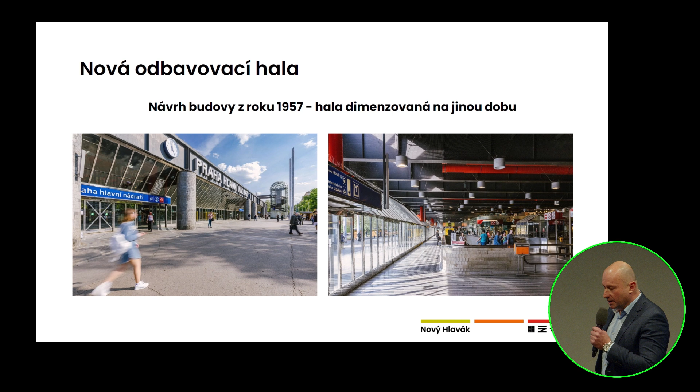So why did we embark on this project? This is the new terminal hall as it is today. It is based on a design from 1957. For that time, it was actually a wonderful building. It was also a result of an architectural competition, and I believe that it really fulfilled its function well.

On the other hand, today, we need to look further ahead. 1957 was a year when nobody thought about a high-speed train connecting Prague and the rest of the Republic with Europe. Nobody at that time could foresee the boom in railroad transport, in suburban and long-distance travel. And today we have to respond to these changes if we want this station to still be the main station.

We are talking about many people coming here for work, and there are tourists coming, and also for studies.

We have to respond to these changes. For the future, we presume there will be a high-speed train route, now being designed on a massive scale. We hope to start building them in a couple of years. It's a phenomenon that's been around in Europe for some time already, and we are a bit late. In Poland, these kinds of projects are designed on a massive scale too. If we want to be in Europe, and if Prague is to remain in the network of European capitals, we have to embark on high-speed rail transport. On top of that, we have huge growth in suburban and long-distance railroad transport.

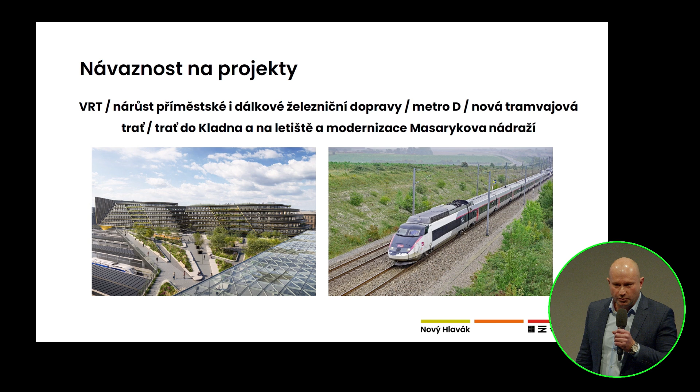If you look elsewhere, especially to Western Europe but also Eastern Europe, you can see each capital is preparing similar projects. They are reconstructing their main stations. Many are already completed, such as Berlin, Vienna, Rotterdam, or London, to name a few. There's strong support for public transportation, which is environmentally friendly, and we are joining the bandwagon, simply doing the same.

There was the Grande Stazione company. Many people actually say, why are you going to reconstruct it? Grande Stazione already did their job. But actually the only thing they did was put commercial units there. They tried to maximize commerce, but they were not addressing the terminal hall as such. The reconstruction is already outdated. There is a strong need for renovation, and Grande Stazione did not address the problem of insufficient capacity.

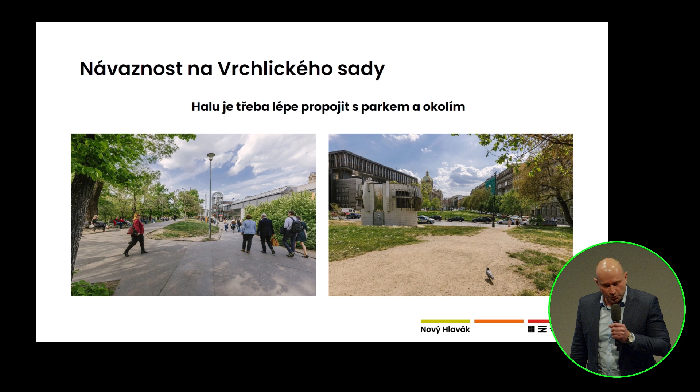How to make it possible, not for 90,000, but for 200,000 people to be there every day? That was the main reason why we had to start looking for a solution, and we wanted a transparent and fair solution, which is why we chose the competition dialogue, making it possible to approach the best architectural studios globally so we obtain high quality architecture.

Of course it is not easy elsewhere abroad. The projects always bring many emotions, many reactions to that. When you look also elsewhere, you see that railroad stations are part of the cities, and people of these big cities are proud. If you look at Austria or Germany, frequently the main station is really the landmark. That's why it's worth focusing on this place.

So now I would pass the floor to my colleague Jakub Hendrich, who is going to talk about the architectural competition.

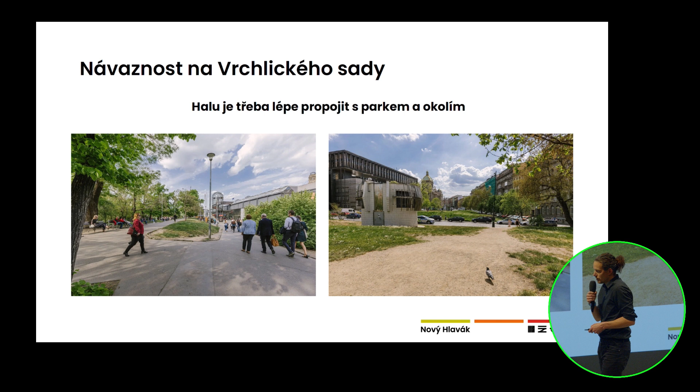There have been very big influences, and the biggest change was connected to the construction of the terminal hall. Now it's very hard to keep the park in a certain structure. There are many people walking through the park, many visitors, travelers, etc. But it does not offer any benefit for the people around there. There are no activities, but there's also no biodiversity. There are no ecosystemical services.

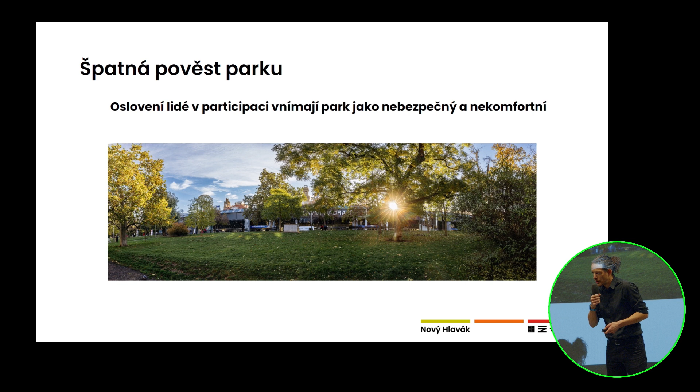When we prepared for the dialogue, we talked to people who use the park, who walk there, and we wanted to hear from them how they use the park or how they would like to use it. And that was very important feedback, because we could see that there is a lot of potential in that park, because there are many users who would like to actually use that park, but it does not fulfill the benefits that they would expect.

A similar topic is the tram tracks, which also means connecting the train station to other connections of public transportation, excluding the Metro C line. The main station only has one metro line as of now, and that's quite a big deficit.

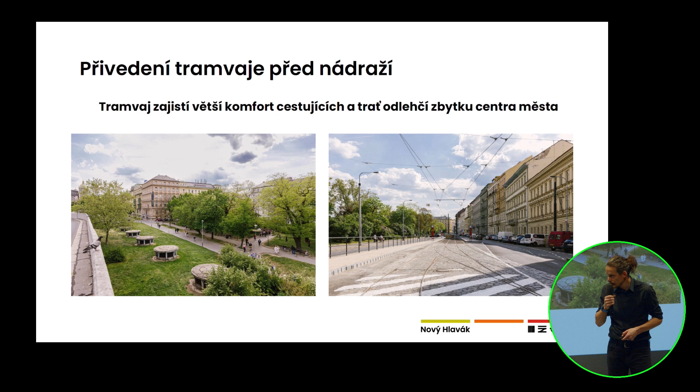There used to be a tram track right at the railway station. It has been removed, and now we are looking for possibilities on how to integrate the tram tracks into the railway station, which should be - even with the Ministry of Culture and with the ground plan or land use plan, it was also a topic how it should be integrated. This was also one of the basic and important conditions, that the tram tracks should be in there. It's also part of that land use plan, but it has to be done in coordination with a solution of how to create that park.

I touched upon this topic. There are areas in the park that cannot be defined. They don't have a concrete function. They're not being used. It's maybe just used for the parking of filmmaking people, for example. So I don't think this is something very useful for a location in the city center of Prague.

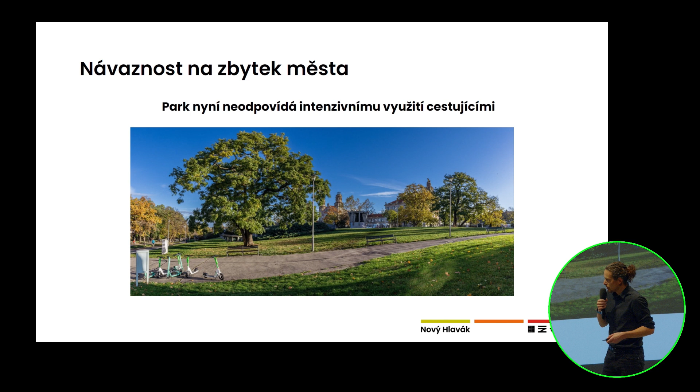And of course, it's also connected to how the park behaves, or what the relationship between the park and the hall is, and how these two parts communicate with each other and how they are connected to each other.

Now we should look at the process, what actually the task of the competitive dialogue was, how it was structured, what task the teams received. Also we will later see how the respective teams reacted, and then we will see the winner, actually the winning design or draft.

There have been 3 sides who actually opened it. It has been entered by the Prague Public Transportation, the City of Prague, and Správa železnic. The City of Prague is responsible for the park and the streets around. The Prague Public Transportation Organization is responsible for the tram tracks in Bolzanova Street and how this network should be connected to the city. And of course, Správa železnic is responsible for the terminal hall.

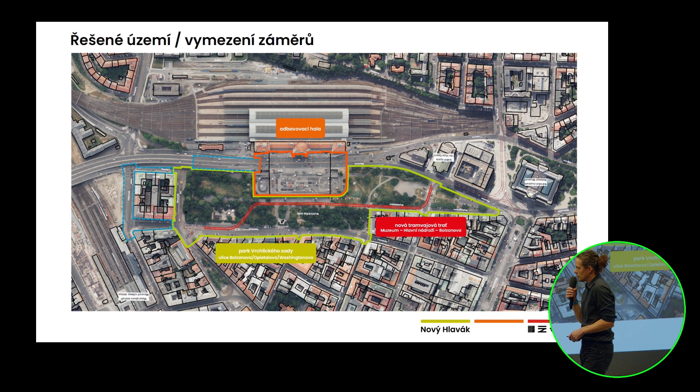Here on the picture you can see that the terminal hall is not just what we see from the park, but it's a huge building that is also connected and somehow separated through the magistral highway. So the solution and the coordination will not be easy. From the early days, we knew that it's going to be difficult, and that's also why we knew that it would be difficult to be successful to really change the whole area.

We had a robust system where upstairs we had some structures. There was IPR, the city, who was responsible for the project, but at the same time, we also had to discuss who's managing the whole dialogue. We also had legal support. We received support from other parties - either the public, their participation, it was some parts of the city or heritage offices, and of course there has been the jury, the committee. Altogether this created the process of this competitive dialogue, and we expect that this organism is going to live longer and continue.

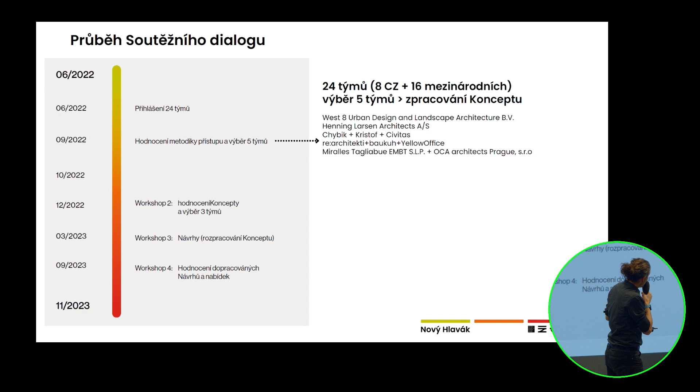The competitive dialogue has a number of phases. We had 4 phases. Looking back, I think it was good because we did not only work on the task, but it was also about the addition of documents and specialization. But step by step, we could also reduce the number of participants. This helped us to work with the individual designs, comment on them and proposals, and find the best solutions for the final designs.

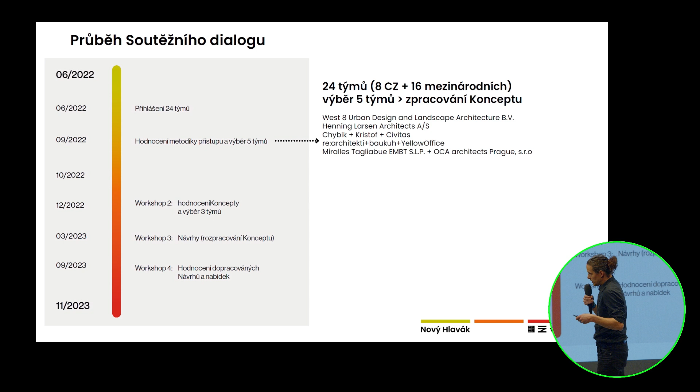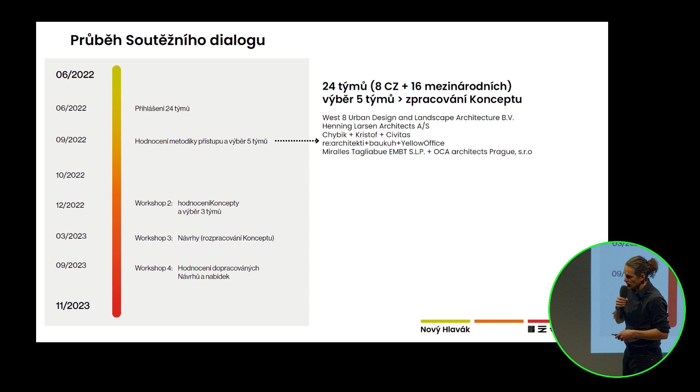At the beginning, we had 24 teams. They handed in methods of how they would explain, and they tried to defend it with their references and what they describe, and how they could realize it. It's also important to mention that in the team there had to be 3 experts: an architect, a landscape architect, and a transportation engineer.

Regarding the concept phase, I will have to go one step back. From the 24 teams, there were 5 teams that could continue to the next step, where they worked out their concepts, the basic way of how to solve that solution. And from the 5 teams, we chose 3 teams that created a final concept and a detailed concept, and that's what they handed in.

How was it structured? What did the teams get? What was at their disposal? There was some documentation, some historical research of the hall, the park, and participation of the public that consisted of different phases and focused on different parts and groups. But then also some technical documentation.

For example, the number of people walking there or cyclists has been calculated.

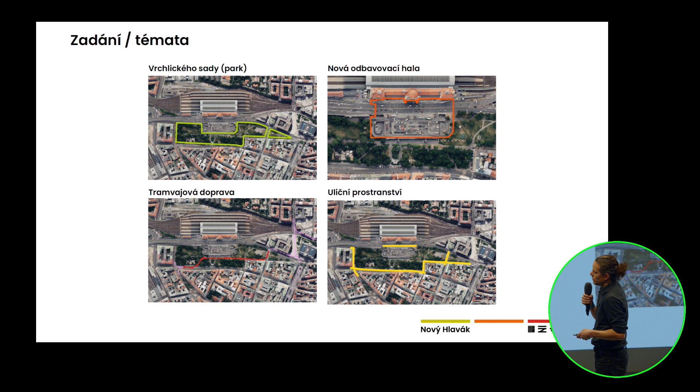So it's not about the current state, but how it's supposed to look in the future. And then, what was their task? It was about 4 parts: the hall, the tram track, and how to solve the solution in the neighboring streets, especially about transportation.

The respective topics, we had subtopics later on in the phase of the process, and we could see that this is just an example of a few topics that we can find in that area. But these were topics we expected from the competitors to find solutions for, and there should also be an interconnection between these topics.

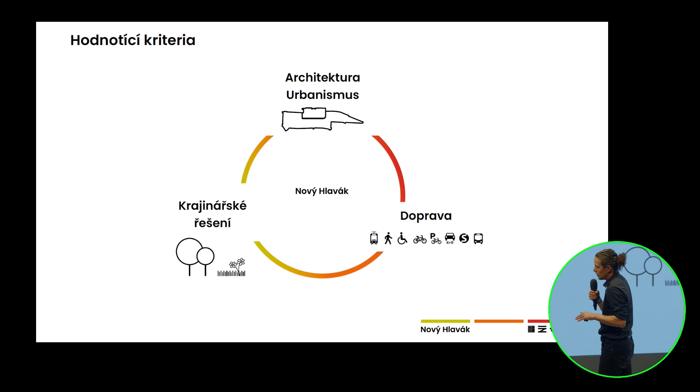And for me, one of the most important schemes of how this competitive dialogue was working, and also how to actually grade it and use the criteria, was urbanism and architecture, landscape solutions, and transportation. Of course, below these are just headlines of other topics, and these topics are influencing each other.

If the quality works well, then it might be stronger than some other solution, for example, architecture or urbanism. So this is an important part.

In the beginning, when we initiated the work, I really liked the synergy between the three institutions, and it would be great if from this synergy we could find a harmonic solution, a vision full of harmony. And I think we also succeeded in that.

In the beginning, we received 24 concepts of philosophy, so to say. We chose 5 and asked these 5 to really create a concept, a solution. And very early we could see the core of the problem that deserved a reaction.

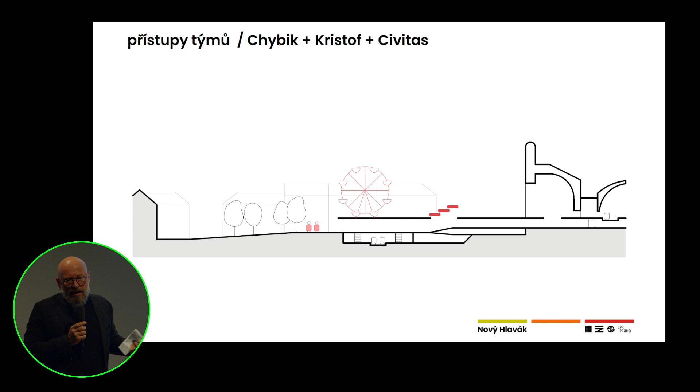Actually, it made it even more complicated, and it cemented the situation as it is today. Moreover, this semi-public space would be dependent on artificial promotion of the events. Someone would have to organize these events, and it would not be for spontaneous events.

Another team decided to make there a roof which would be slightly elevated, which would also let some daylight enter. There would be glass used in the roof, which would mean that again it would be much lighter inside the terminal hall, suddenly making it into a more pleasant place. But still you see a barrier between these places. You still did not obtain a permeable space.

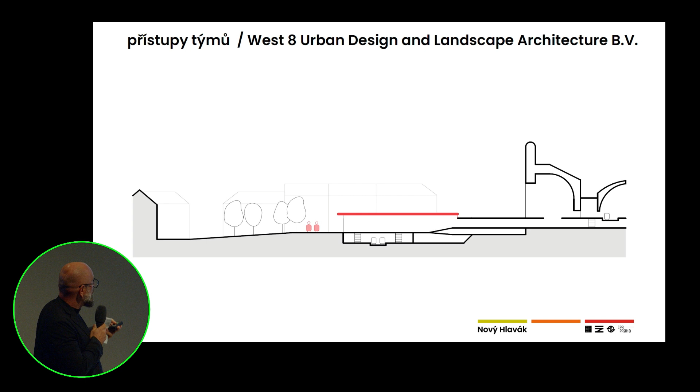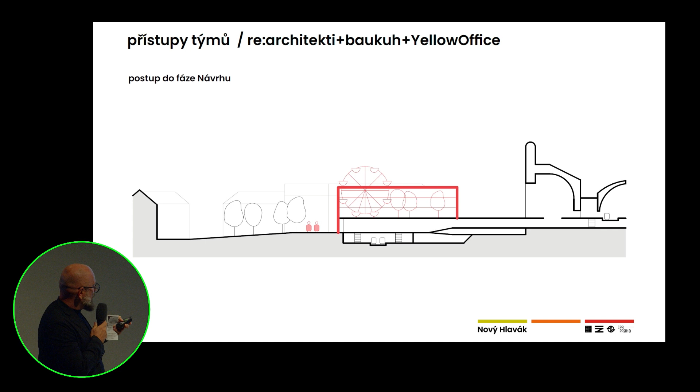Another entry decided to add two new buildings from the south and from the north. So there were two add-ons, and the parking place was to be turned into a piazzetta with three parterres. One of them would be bordered by these two add-ons, and you would obtain a kind of piazza there, inside a piazza, and that was an interesting idea. But again, it is dependent on the activities which would have to be organized artificially. They would be dependent on somebody animating this place deliberately, and it would perhaps not be a part of a naturally vivid place, an urban place. As for the communication links, they did not change that much, and that is why this entry was not seen as very impressive.

Another one, which was among the top three, did not dare to remove the parking deck physically, but just decided to change the function. They put a new identity to the place by adding new glass roofs, which was a free interpretation of the halls above the track yard. They created something like a winter garden, a huge greenhouse, which would go to the center of the former square. So basically, you would hide everything under one greenhouse, which would be a kind of orangery, with the possibility of organizing markets, seasonal activities. But it was really a greenhouse space.

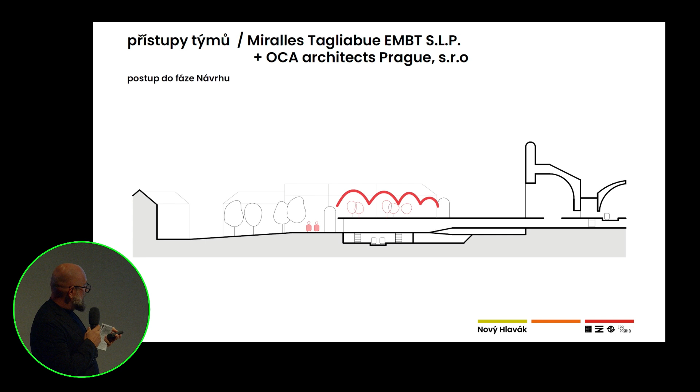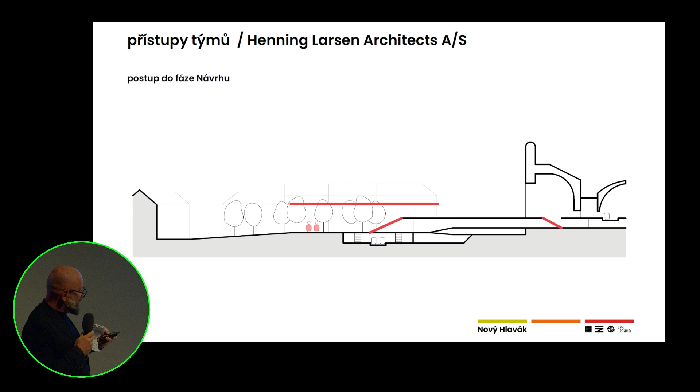And then there's another proposal, which had a very radical approach. Let's simply remove the parking deck. Let's just do away with it, and we will just close it where we need it, where we need just the facility for the travelers, and otherwise let us go back to the original contours. In other words, the part where you need comfortably to get people to the metro, to the tram, would just be covered by one roof, which will be transparent, but otherwise you make it perfectly permeable. That actually is the winning design, which convinced the majority of the jury.

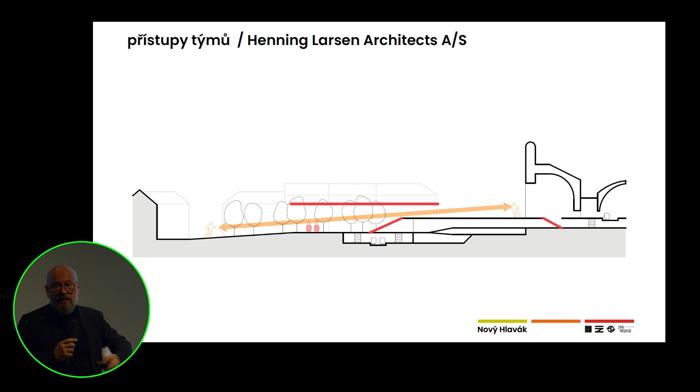In terms of restoration of the original contours of the space, we found that this intervention is not only radical and revolutionary, but also very sensitive to history, to continuity of the space. You are removing part of the building that we are respecting, but at the same time they are preserving the ground, and they are preserving many elements, and therefore they are even coming back to the original contours, giving this public space its original borders. Thanks to the humanization of Magistrala, it is now, or it will be possible, to go from the Fanta building on foot, normally, through this whole place. You can go across it without having to dive underground.

As I said, we had 27 members in the jury, each from a different expertise. There were 11 architects and then other experts. And yet, we managed almost unanimously to agree on the winner.

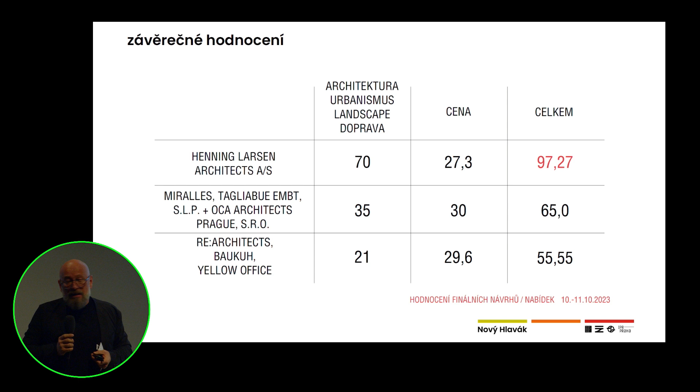We were evaluating several aspects according to criteria which were given beforehand. As you can see, there is a large margin, the winning team won by a large margin. Actually, there was a lot of discussion about the second and the third place, but there was no doubt as to the winner.

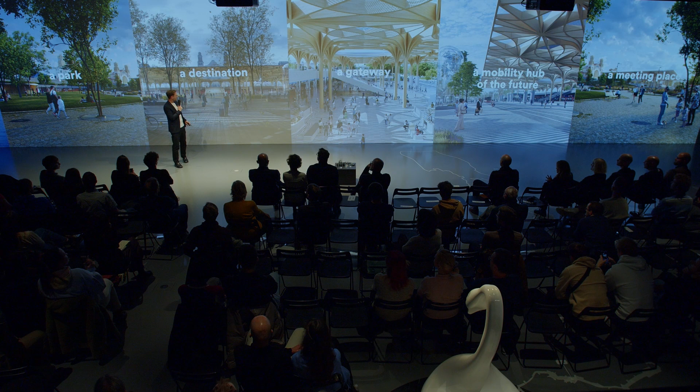So when we talk about these ambitions, it is about celebrating the place through the seasons. It's about creating landscape, hardscape, softscape, for recreation, for activation, and so on. It is about creating a memorable space, whether you're outdoor or indoor, but also integrating future mobility with trams, bicycles, buses, metros, and trains, so it really becomes a true meeting place.

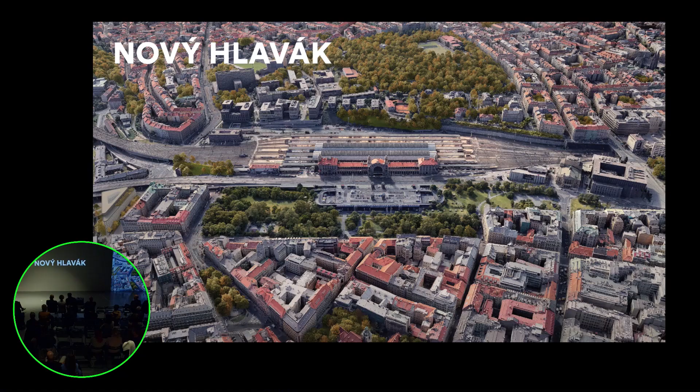This is the station area as we see it today. We see a huge potential in it, which also means that we see some issues. Some people before today already explained some of the issues. We really analyzed the place in the first stage of the competition, and we could see a lot of borders between the park, the terminal hall, and the existing historic Fanta station. These borders we are aiming to break down and reconnect the station area with its city, with Prague. We see this and we call this a mobility park of the future, which is not only about running through, but also a place we want to stay.

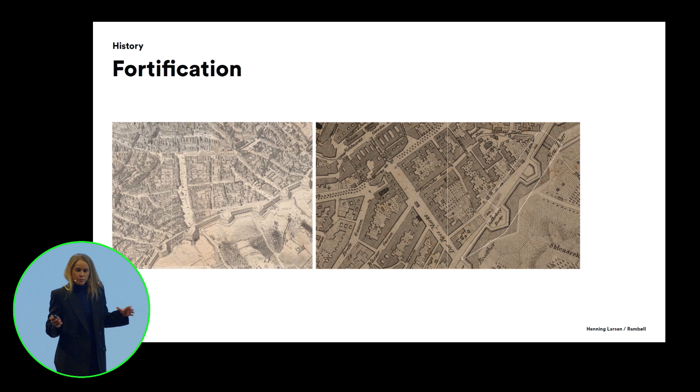This station area has been a fortification area before. It has been the green belt with a fortification around the historic city center of Prague. This area transformed into the station area, first with the Franz Josef station, which was located directly here on the historic city edge. It was back then connected with the park, which was a really pleasant space for leisure, for recreational purpose. It was the place where you went with your family and strolled around, had an ice cream, and enjoyed that park. Also, the Franz Josef station and the new Fanta station later were actually really active buildings. It was a smaller road back then, and you parked here, you could go in and out, and had a really active, lively frontage. It was part of Prague, part of the everyday life. Also here we can see already the fantastic trees which survived from that time.

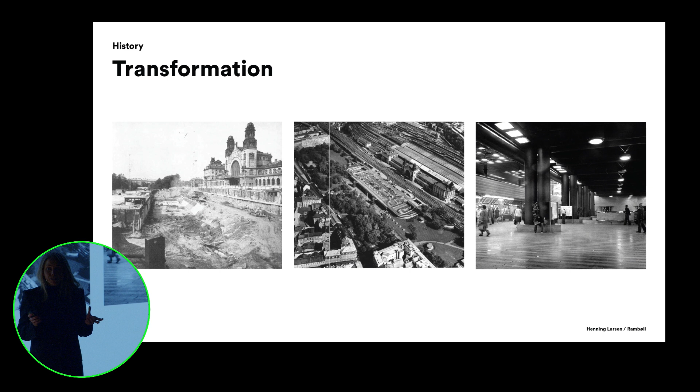The area got transformed, as we heard, many times, and the last larger transformation came by establishing the Magistrala. The Magistrala is probably why we have a lot of the issues which we're facing today. It was really disconnecting the station area from its surrounding. Also with the extension of the terminal hall, we can see that these borders created an even bigger disconnection to its city and to its environment. Looking at the terminal hall, we can also see all the craftsmanship in there, and we love and we are inspired by this fantastic detailing and choice of materials, particular design from that time.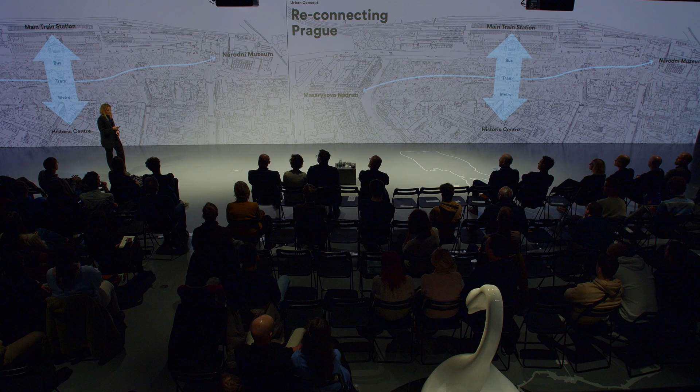So what's next? We try to focus on the bigger lines first, which are really about connecting the main train station with the historic city center. The other direction, north-south, is not least important, and we worked a lot with connecting the Masaryk station together with the entire cultural area. So these were the parameters we drew up first. When you look at this drawing of today's station, you can see that you have the Fanta building with the trains, you have the bus stations, you have the metro station in the underground, and the future tram station really disconnected from each other.

We are working with preserving, we are working with extending some of the existing, and we are working with adding a new collective roof. And this allows us to actually span out and reach out, connect all the different modes of mobility, the tram station, the metro station, the bus and kiss and ride, and even the connectivity to the trains under one collective roof.

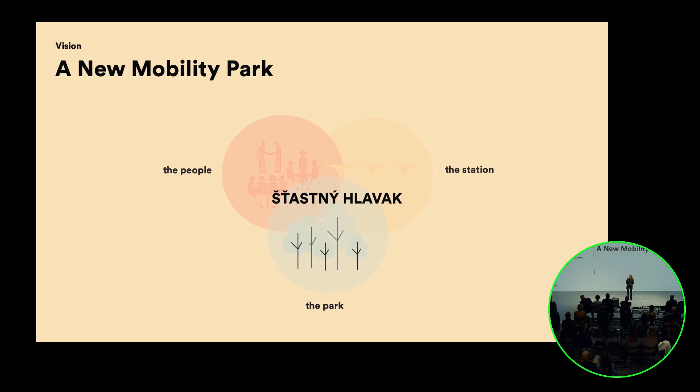From the beginning, our vision has been to create a holistic vision here, to not think about landscape, architecture and urbanism as three different silos, but think about the people which flow through the nature and the station as one project. We focused from the beginning on three strategies, which we refined throughout the process.

We thought to create this mobility park of the future, we need to develop a strategy which takes care of safety. It's important to create a safe space where the people in their everyday life feel safe, but where also transportation can work in a safe manner. We worked with mobility, not only about seamless mobility, but also with future mobility, focusing on enhancing sustainable modes of traffic. We also worked with last mile connectivity, and my colleagues will tell much more about this in detail later.

Heritage, we had a really clear vision to preserve as much as we can as the first thing. The next step is to extend what we have and actually draw from the qualities which are there. And then, last but not least, we are adding a new layer on top, designed according to future needs, and we're trying to reduce as much carbon as we can here on site.

From invisible places to an inviting gateway of Prague. From disorientation and really an introvert feeling to distinct and intuitive wayfinding.

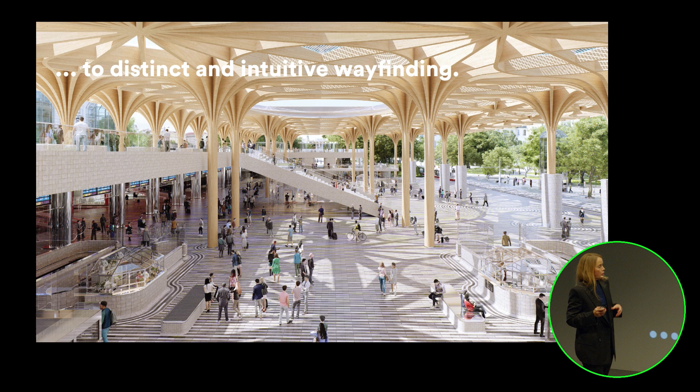From closed edge zones, as for example here, the Bolzanova garage, which is actually lying underneath the Magistrala, and not a lot of people know about it. It's empty since many years. We go from this to vibrant and active cityscapes, which create a safety feeling, but also give a liveliness and influence the park in a very positive way.

From obstacles and borders like bushes, to seamless flow and overviewable wayfinding. From a disconnected park to an inviting arrival square and of course destination. From an introvert station, as we found it from the beginning, to something which opens up to its city in a very generous way and welcomes the citizens of Prague, not only in their everyday life, but also when they go out on larger journeys to Hamburg, to Munich, and so forth.

I will give the word to our landscape architect, who will present the landscape part, and after that Mikkel will go more in detail on the architecture. Thank you.

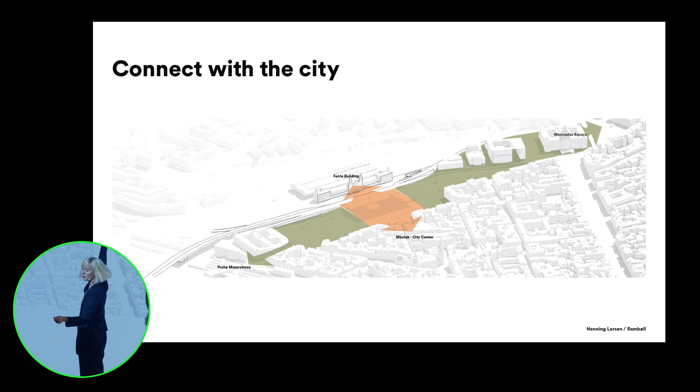So what was important for us was to connect - first, connect the Fanta building, the terminal hall, and the city center, but also connect all the way up to the Narodni Museum and to the Vrchlického station. Next thing is to think about the park and the terminal hall as one thing, not as a station and a park, but actually integrate the station and the park together, to bring the park into the station, but also bring the station out into the park.

Because this is amazing, that you actually arrive in your city into a park. You don't see that many places, but here we have the possibility of doing something extraordinary. It's also about activating the park and bringing it back to Prague, really giving the local people a feeling of a destination, a place you want to come and visit and hang out and be.

So we divided it into three different zones: the active zone, which is more for the local people, the station plaza, which is this arrival place, and then the cultural zone linking up to the cultural institutions in the south.

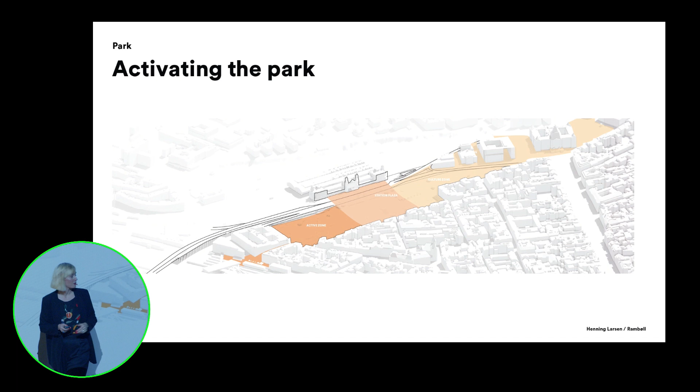And here you see the new park. For us, it was both about being inspired by the history, by the organic shapes, by the beautiful trees that were planted at that time, and also about bringing back the water feature and placing it on the arrival plaza.

We were very inspired by the newly renovated park around the Narodni Museum, which is really beautifully done. So we take this cobblestone peacock pavement and bring it all the way into our park, really connecting these two parks to each other. We also bring the furniture and the way of planting into the park, so it becomes like a big green stripe in the city.

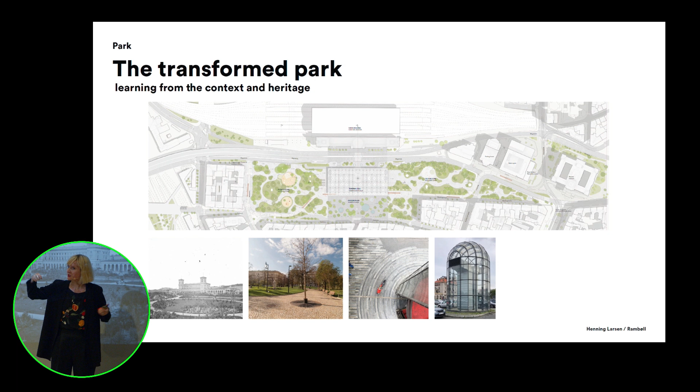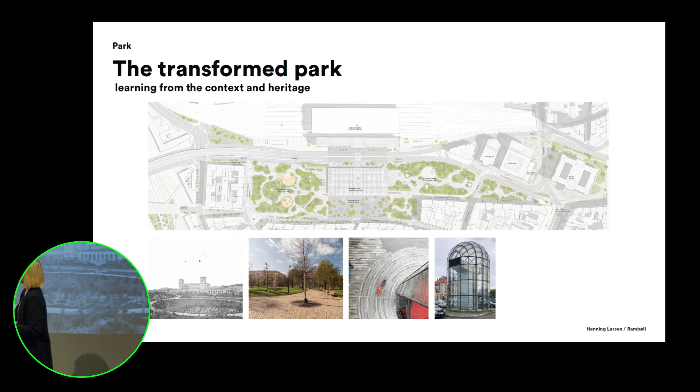And then, of course, we really love the elements of the terminal hall - the pavement, the curves, so many beautiful details that we wanted to bring out into the plaza and celebrate. So it's where you are meeting Prague and where you are invited to the city on foot and continuing your journey.

And then the trees are very important for us. It's the character of the place. They have these beautiful pagoda trees. When renovating this park and bringing in the tram, we will have to take a lot of trees down, unfortunately, but we are replacing them with the same amount of trees, keeping up this character of the park, because it is so beautiful.

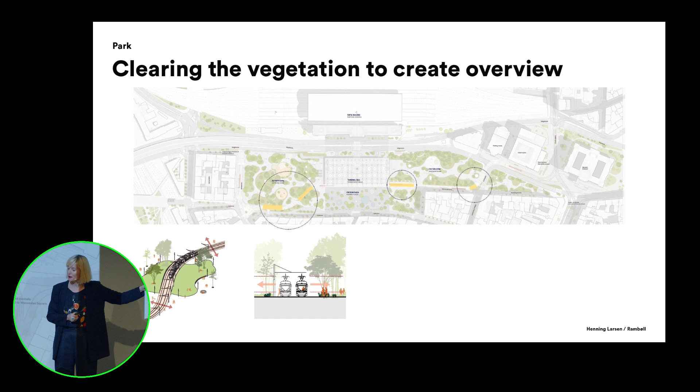It's important for us to clear the bushes and create visibility throughout the park, not only for the tram people so they can see other people coming and don't hit them, but also for you to see each other, because that makes a safe park and a safe space. Then we reintroduce another layer of vegetation, which is lower, and which brings in the seasonal aspects of the year.

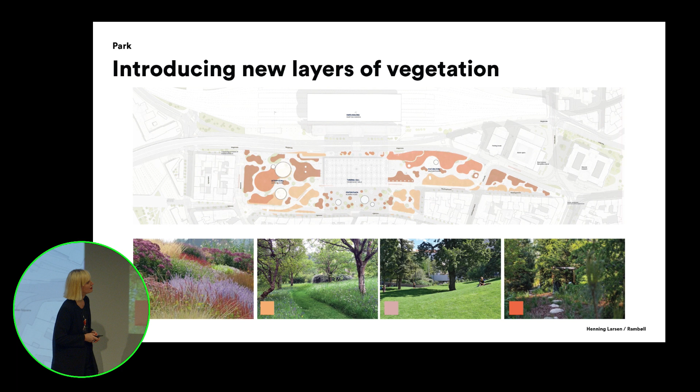It's also how we use the plant beds for water treatment. In case of a heavy rainburst, we can lead the water all the way into the plant beds and hold it until there's room enough again in the sewer system.

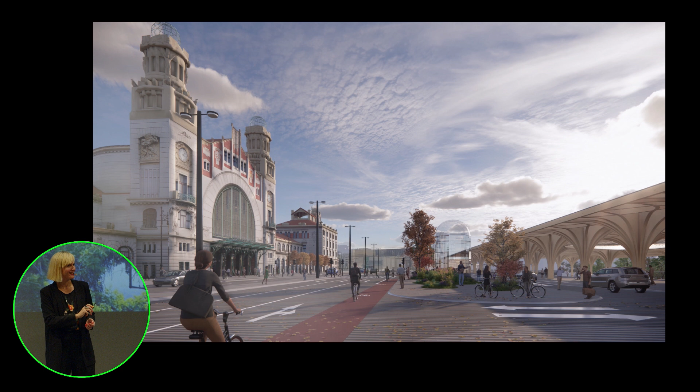Here we see the park, the new pavement, the peacock cobblestone pavement, the new elements of vegetation, and how you can overview most of the park, with different activities being spelled out, which I will walk you through in a moment. And then also keeping, of course, the monuments of the park, both the historical parts, but also the monuments from the brutalist period, because they hold a big history and a big sense of beauty.

Here you see the station plaza. What you experience today coming out of the station is a little disorientating - where should I go, how do I proceed with my journey throughout Prague? When you come to Opletalova Street, you meet a massive barrier of parked cars and a road. And coming from the city and entering the station, it's really a barrier to go through.

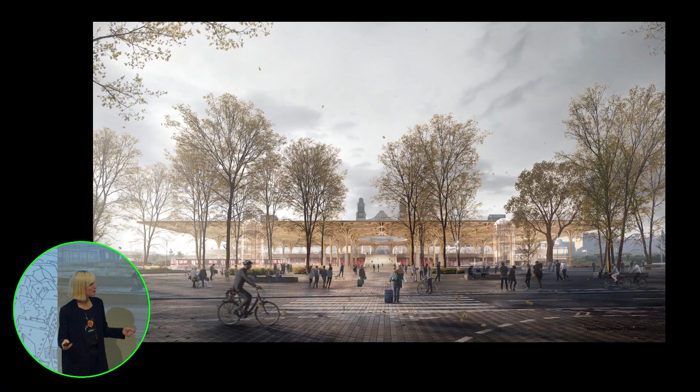So we are opening up, taking away a lot of the car parks and allocating them, narrowing down the street, and making sure pedestrians can come safely across Opletalova Street. And then making this arrival plaza where it's possible to wait for your family or for the train to come, park your bike, and enjoy this beautiful big plaza. We're also taking the striped pavement all the way up to Wilsonova Street and connecting it to the Fanta building.

And here you see the situation of coming from Wilsonova Street and arriving to the city - it's actually possible right now to see where you are and where to go.

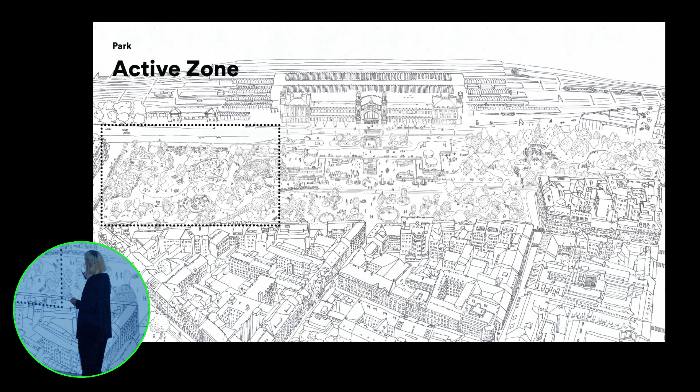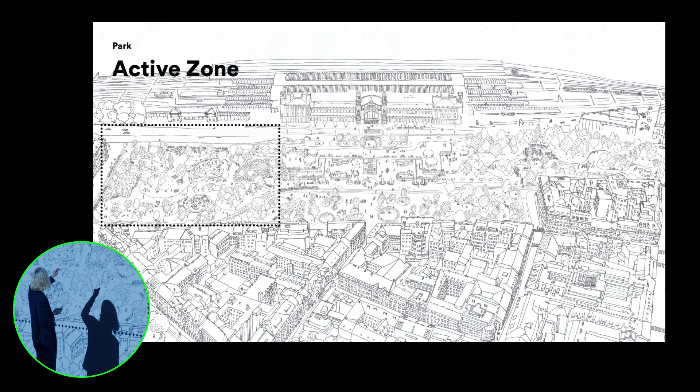The active part in the north is kind of like a local park - it's where you go on Sundays for a picnic. We are refurbishing the playground. There will be an area for dog walking, a skate park, and the Bolzanova garage up here is being activated again, so there will be shops and bicycle repair. It's really a place to visit, enjoy, and be active in most of the day.

Here you see the Bolzanova garage, which is being transformed, also making sure that the massive flow coming from the train station onto Masaryk station is provided for and easy.

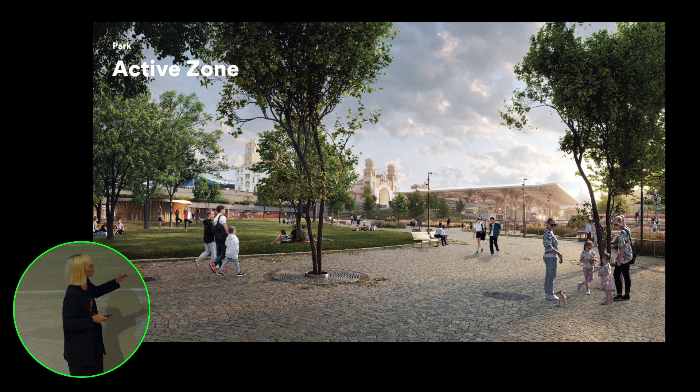And here again, the transformation. The utility lawn, which is there today, we are keeping it - it's a nice place to hang out. But there's also a lot more activities going on in the park.

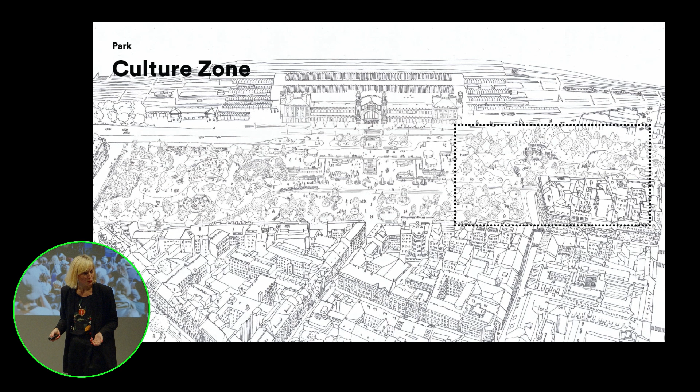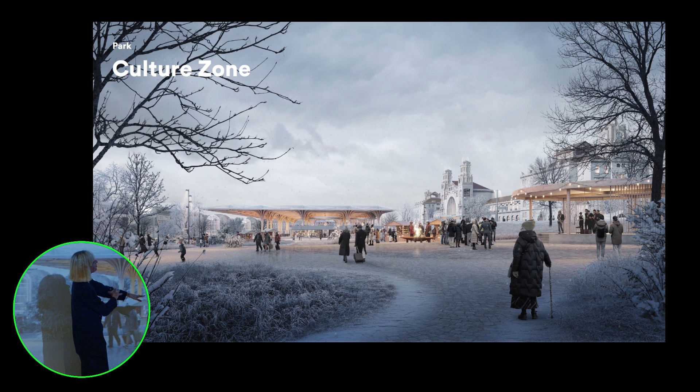And then last but not least, the cultural part, which is more like a regional area where all of Prague is invited in. It's an unprogrammed space, you could say, where everything can happen. We are placing a pavilion up here, so it's possible to have a concert and different activities - it could be a Christmas market, a flea market, a community dinner, anything could happen here. And here we see the winter situation, where you put up small Christmas shops, there's a bonfire and maybe music playing. So it's going to be this lively place that you can walk through and into the station. And here you see how the park continues under the roof, celebrating the situation.

And now I think Mikkel will continue. Can you hear me? Yes, there we go.

Of course, when we design such a big mobility park for the future, it's super important how we design for different modes of mobility. We like to work with these pyramids where we say we need most from the top, where it's widest, and least from the bottom. So we've designed this with pedestrians in mind as the first thing, making sure there are the routes required through the park, but also inside the terminal, cleaning up the mess of the historical layers and making sure there's enough room for the flow of pedestrians coming through here.

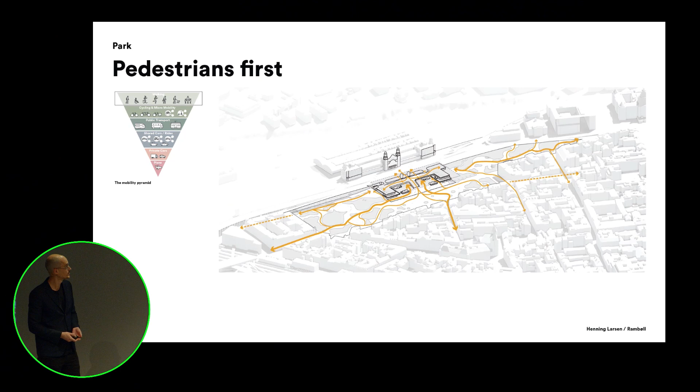Next is about enhancing the journey for bicycles. There's a bigger plan of transforming Prague into a more bicycle-friendly city, and we are tapping into that bicycle plan, ensuring it's easy to get access and get close to the station with your bike. There's great opportunities for parking, both long-term indoor bike parking and short-term parking close to where you arrive.

Then we look at public transportation, where, as mentioned earlier, the tram will be easily accessible and protected under the roof from the weather. The bus stations can also drop off below the roof up on Magistrale. We also provide kiss-and-ride facilities for taxis, Ubers, and shared car systems.

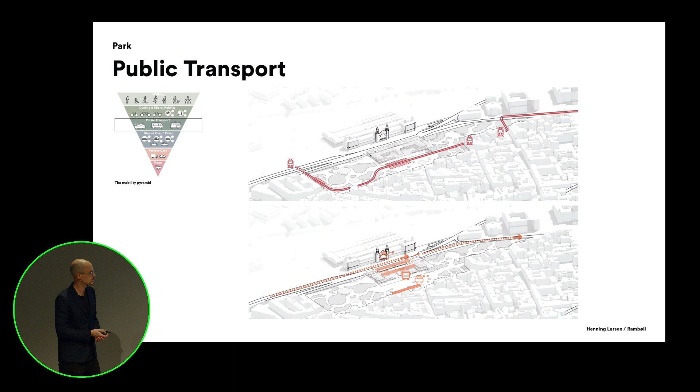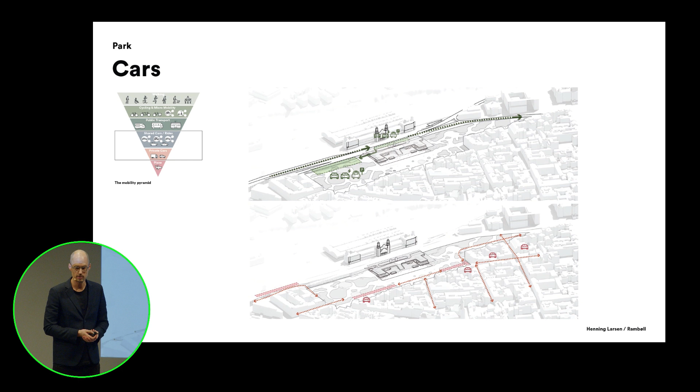At the bottom we have private cars, where of course we still need cars going to the site, but it will be minimized as much as possible. We're cleaning up a lot of the parking on Opletalova Street, while ensuring there's still enough parking for residents that live there. We're also working with the Bolzanova garage as a parking facility that could be used in the future, but could also be transformed over time into the retail we saw earlier, or into more of a mobility hub with shared car systems and charging for electric vehicles. So that was the mobility.

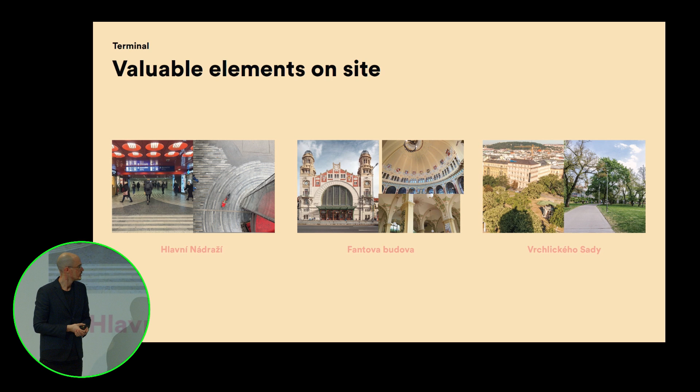Now we'll go back and talk a bit more about the architecture and the inspiration for the design. When we approached the site, we immediately saw a lot of qualities: the existing terminal hall with its fantastic design language of iconic curved shapes and stripes, the Fantova building, which is a bit hidden today but has beautiful exterior and interior details with arches, dome shapes, and wooden details, and of course the park, which has been mentioned several times already.

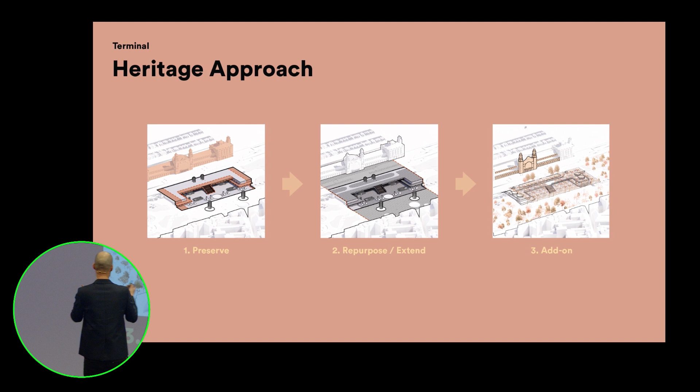So we started investigating the layers of time - what is there, what should we keep - and from there defined a heritage approach, which Grete already mentioned earlier. We try to preserve as much as we can in the terminal, but we still need to reduce or remove the facade and roof to allow people in and get the views. Besides that, we want to preserve as much as possible. Then we repurpose, extend, and even drag elements from the design into the park and into Magistrale, and finally we add the large generous roof on top.

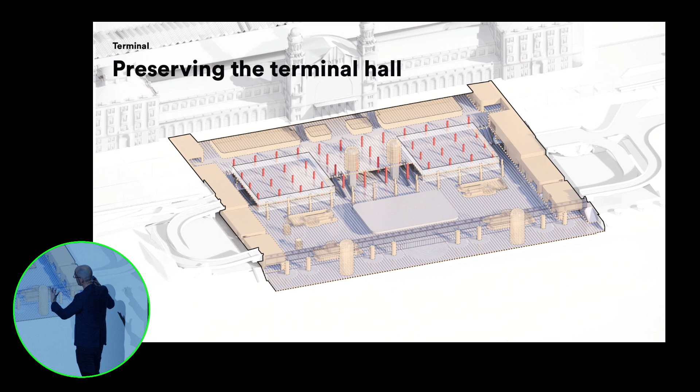Here we see it in more detail. We preserve a lot on the side wings of the existing terminal, and we want to preserve all the fantastic glass domes. Two of them move further out onto the plaza. The two on Magistrale move out to the further ends of the park, so they greet people as they arrive at the site, and two stay in place. There are also elements here, these iconic round columns in the facade, which we want to keep.

Inside, we need to clean up a little and make more room for future passengers. The next step is cleaning up the interior, making the retail a bit smaller to ensure flow through the space, extending the terminal to the sides and opening it up so people can flow through fluently from the sides as well. Then we add a new facade where today there are these iconic double columns, using that to create a new facade so we still have a large heated interior area.

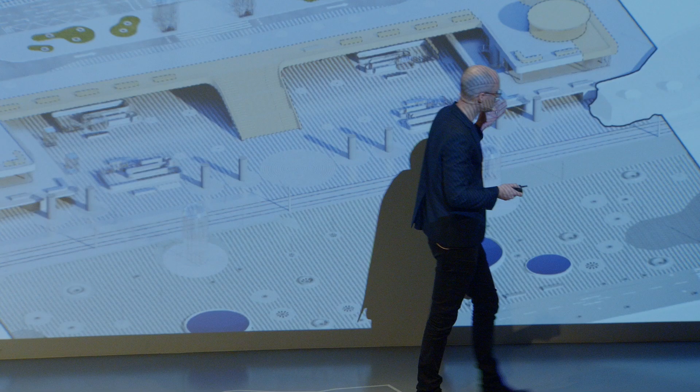Then we extend up onto Magistrale, providing a large stair in the center, which is not only for flow but also becomes an iconic meeting space where everyone can sit and enjoy the views to the park - a place to meet under the large skylight. I should also mention the ledges we design on the sides where people can sit, creating a lot of activation around the station's retail. So it's also a place you want to stay at and enjoy. And then lastly, the roof on top.

So the elements that we've been looking at are the tiles, the stripes, but also the glass elements and the amazing facades and the use of metal, which is super iconic in the terminal from the 70s. We take those elements and use them when we design new elements. So if we do a bench, bicycle parking, or water pond, it has the same shapes and the same materials as the existing terminal.

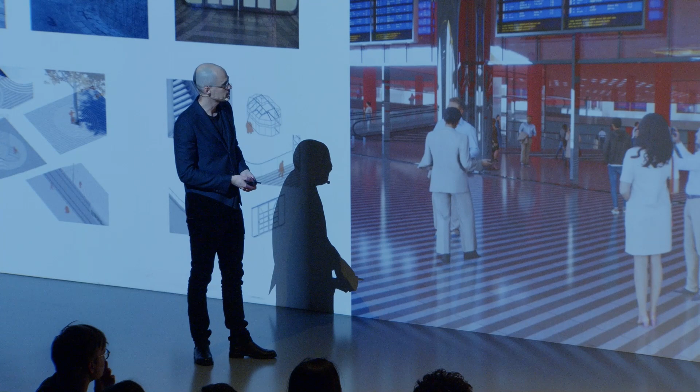And here you see how we add this new facade in between the double columns that will have a stainless steel finish in the future. We imagine this facade would be amazing to have open a lot of the year when the weather allows for it, but it can also be closed in the winter and in the cold seasons, as we are in now.

And inside, we remove some of the additions from the 90s, and then we make smaller retail, and we really try to do everything in the original language, but also still providing plenty of seating areas and waiting areas for the passengers.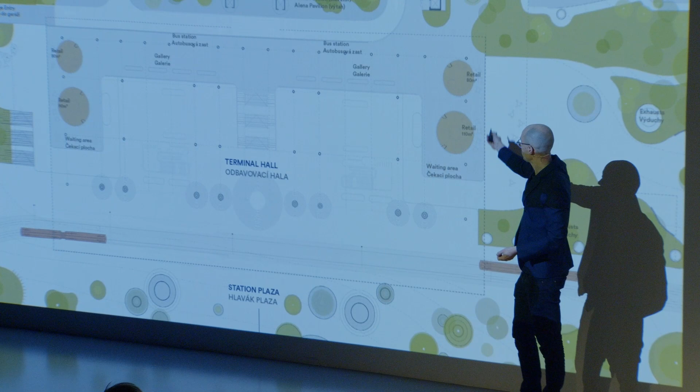So here you see the floor plans, where up on the Magistrale you see the kiss and ride that allows buses to come in below the roof. We have some retail pavilions up here that are going to have absolutely incredible views to the city and the park, and make sure that there's always active life up here 24/7.

As we come down further in the station to level -1, it's really connected to the landscape here. This is where people are going to be flowing from the Bolzanova garage and straight into the middle level, and can go straight over to the trains from there. You can also see how we are providing a lot of seating, both inside and outside in the retail units, where people can sit and wait while they enjoy a coffee or a snack or similar.

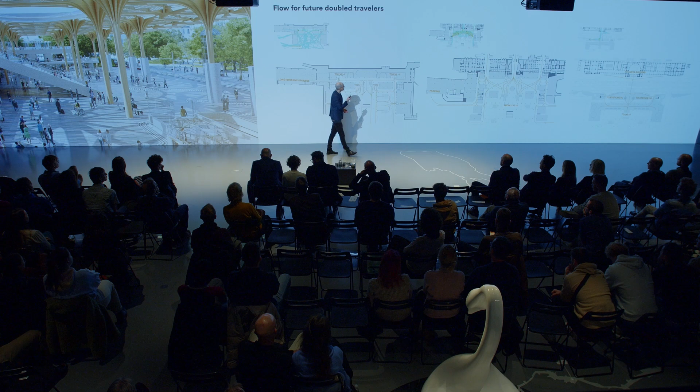And then as we get to the lower floor here, because we were moving the ramps and so on, we can actually extend the retail to the sides, allowing for more retail. So this could be where you have your supermarket or your Billa in the future.

And then cleaning up again and making sure that there's room here for people to flow fluently through the station. And you have the tram platform integrated into that there. Yeah, so the flow has been a major focus here. You can see how now you can flow seamlessly through the station on these levels.

And this is something we have worked intensively together with Ramboll also to simulate how this actually works in the future, where we're expecting at least a doubling of capacity.

The retail is also part of the activation strategy. So we have worked with how can we integrate different types of retail into this. And as I mentioned earlier, we think the ledges or the side wings here, where we have these outdoor terraces, will be a great place to sit and enjoy a coffee or have restaurants in the future.

As we come further into the middle level here, where you have the underpasses to the train stations and people really are flowing through, that's where you have your quick retail with shops, and you can grab a coffee or a newspaper on the way to your train.

And then on the lower level is really where we can have the larger convenience stores, supermarkets, shops, etc. And then in the back there, we still keep tickets, public services, and those types of functions. But it is really part of the safety strategy as well, to make sure that everyone can see each other in this layout, and it's super transparent, so you don't ever feel like you're in a corner that doesn't feel safe, basically.

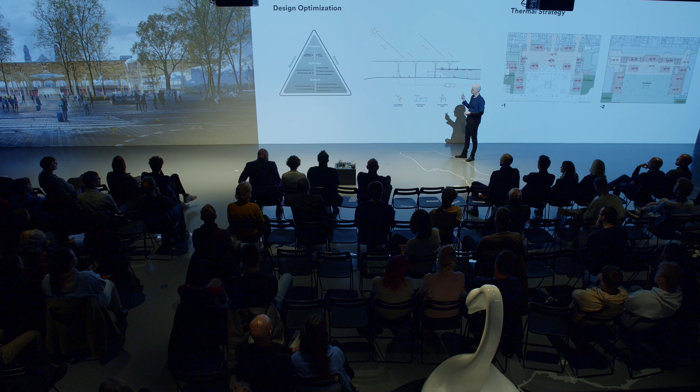And then the middle part is about optimizing. So we really try on the material side to use timber where possible, and of course it's both a choice because it matches the park and the Fantova building, but it's also the sustainable choice as it is material for the future with a low carbon impact. And then on the energy side, it's about providing shade, optimizing for daylight, and then on top, on the pyramid, we have produce, where we add photovoltaics to the roof, so we can also produce energy from this amazing new roof.

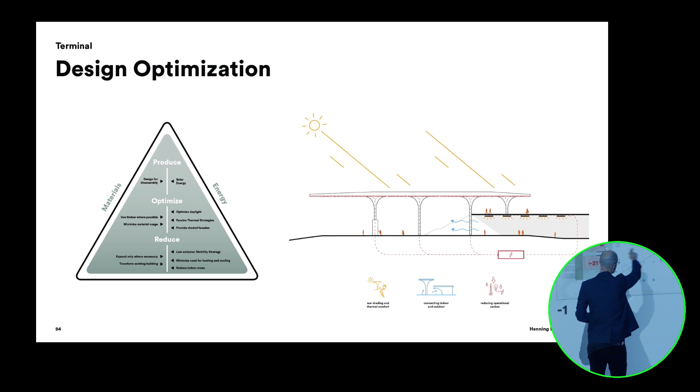So you see here how there is a facade, and this of course will be outdoor, but still the roof helps to temper the space in the summer, so it's not going to be overheated, and it also shields from the wind in the winter, so it will be less cold here, and you will have some sun coming through than in other places of the exterior area. But then we have the facade there, and then we have waiting areas both here and on this floor as well.

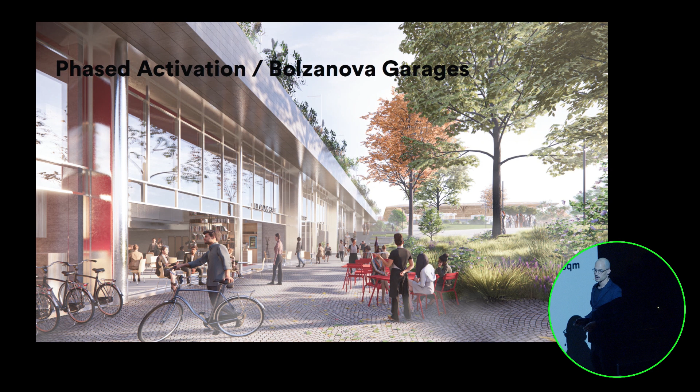So going to the Bolzanova garage, which was mentioned earlier, as I said, it could be used as a parking facility when there's a need for it, but then in the future, the lower floor could be transformed with retail that could front the park. We provide also a bike parking hub there with repair shops and so on, and shared bike systems. And then in the future, the upper floor there could be this shared car mobility hub with charging stations and so on.

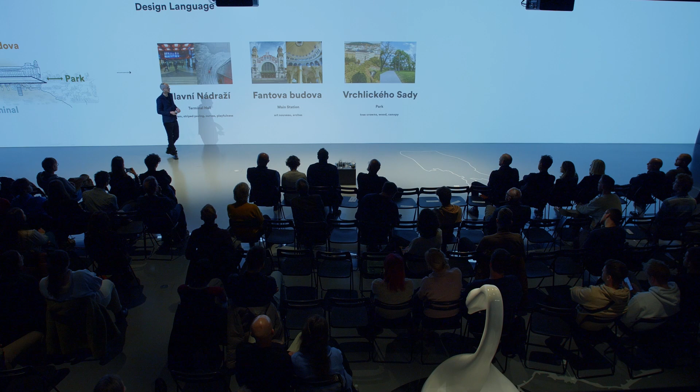So talking a little bit about the roof and the design of that, it has been a major focus, because how do you design something that not only is unique and spectacular, but also really talks to the history of the elements that we are surrounded by here. So it needs to talk to the Fantova building, the terminal, and the park at the same time. And you can say the approach was to be inspired by all three elements: the brutalism, the curves, the striped paving, the Art Nouveau with the arches, the dome, and then the tree crowns of the park.

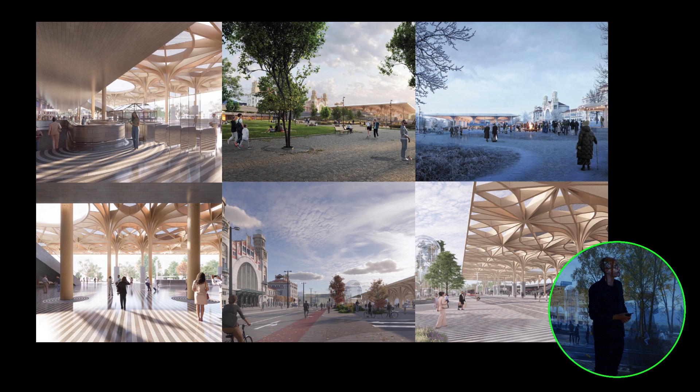Fusioning all of that into one design language, we made the roof as it looks here. And you see here how it looks in different situations and in different areas of the station. We believe we have achieved something here that, especially when you look with the heritage terminal here below, talks in the same language with the curves and the organic approach, but it also has this sort of brutalist boldness, which we also know from the existing station.

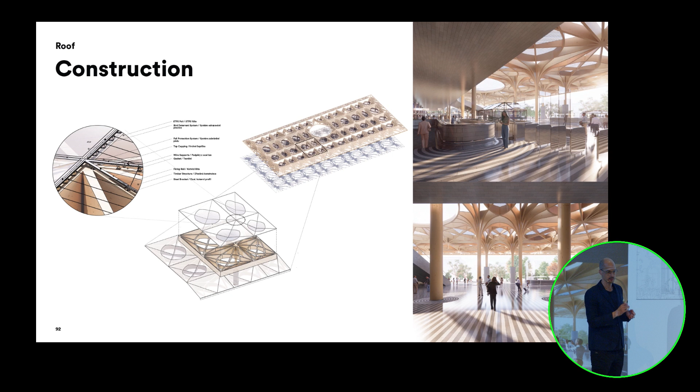The roof is a glulam timber system, fully in timber, which can be prefabricated, so it's fairly easy to assemble on site. And then on top you have this lightweight ETFE membrane, a plastic-based ETFE material that makes sure you don't get rain or snow or anything below this roof.

And that's a look from above. And of course you have this skylight dome in the middle there, which is quite spectacular. It's also made of ETFE, but then you inflate it so it becomes like a cushion, which means we can have it without any visible structure in it. So you will have an amazing look to the sky through this skylight.

Then we have a little animation we would like to play as the last thing. Thank you.

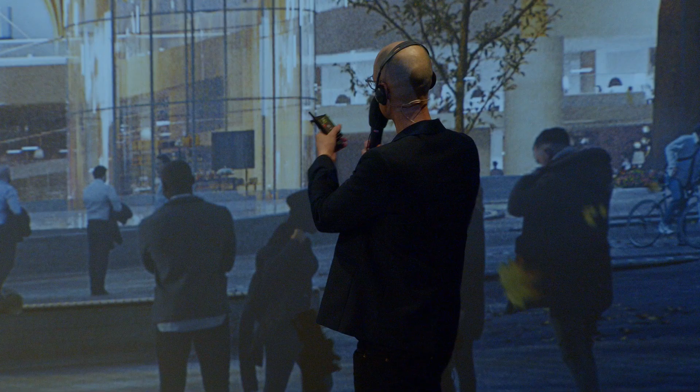I give that further to Mikkel. Thank you for that question. Of course it can look like we are removing half of the indoor area, but we are actually extending the station towards the side, and also cleaning up the interior and providing more public space than retail space, so we are not reducing the area. There's roughly 9,000 square meters of public accessible indoor space today, and in the future there will be around 7,500 square meters of public accessible indoor space. But on top of that, you get around 8,500 square meters of covered and protected outdoor space. So I think that answers the question.

Thank you, and I will give space to someone else. Does anybody want to react? No. So are there other questions? Please wait for the microphone.